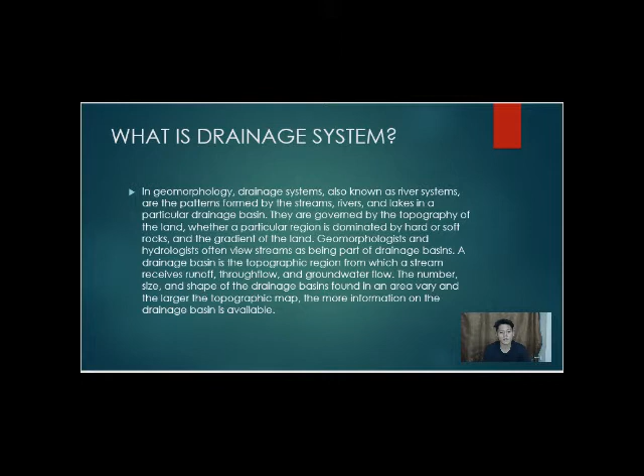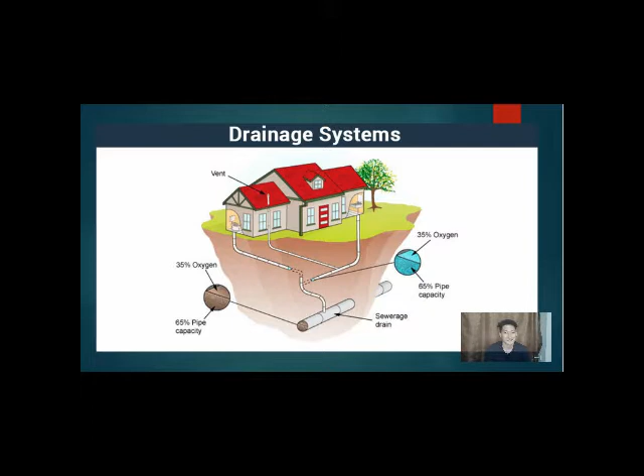So this is an example of the drainage system. And this is an example of the excreta drainage system, also known as a sewer drainage system.

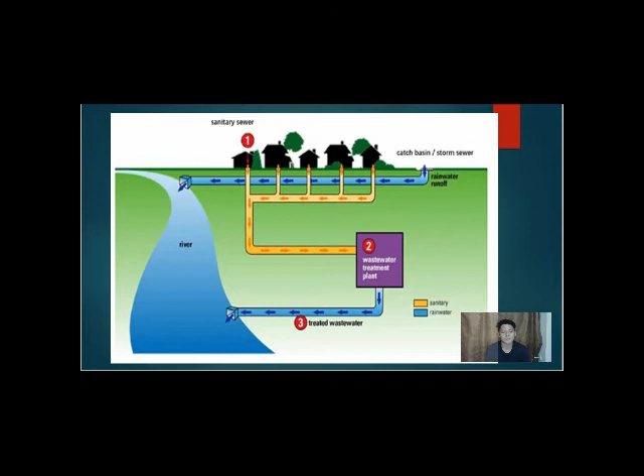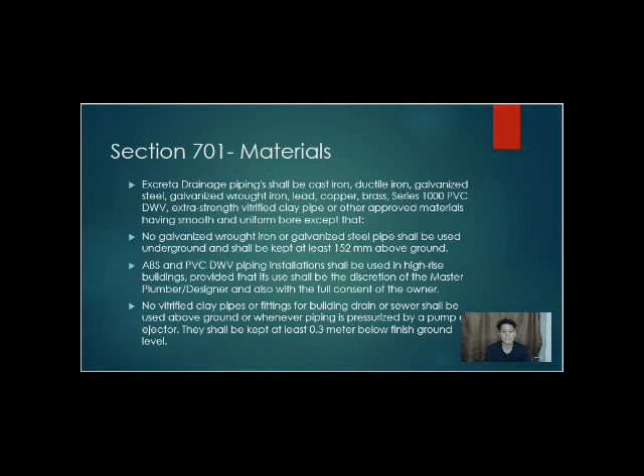Section 701. The materials. Excreta drainage piping shall be cast iron, ductile iron, galvanized steel, galvanized wrought iron, lead, copper, brass, Series 1000 PVC DWV, extra strength vitrified clay pipe, or other approved materials having a smooth and uniform bore, except that no galvanized wrought iron or galvanized steel pipe shall be used underground and shall be kept at least 152 mm above the ground.

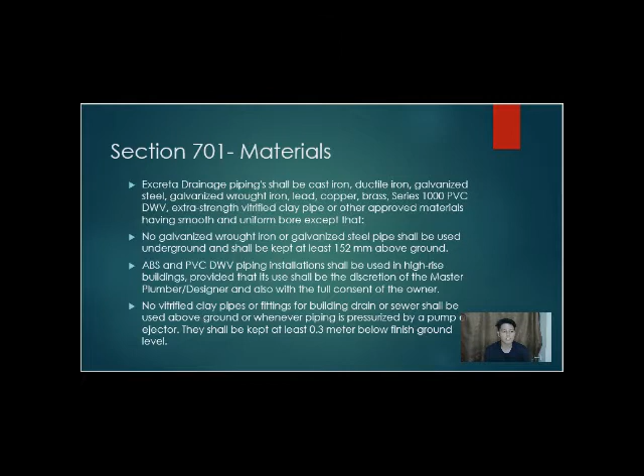ABS and PVC DWV piping installation shall be used in high-rise buildings, provided that its use shall be at the discretion of the master plumber or designer, and also with the full consent of the owner. No vitrified clay pipes or fittings for building drain or sewer shall be used above the ground or wherever piping is pressurized by a pump or ejector. They shall be kept at least 0.3 meter below finished ground level. In this section, it explains all the materials needed to construct an excreta drainage system.

Drainage fittings shall be cast iron, malleable iron, lead, brass, copper, ABS, PVC, vitrified clay, or other approved materials having a smooth interior waterway of the same diameter as the piping served, and all such fittings shall be compatible with the type of pipe used. Fittings on screw pipe joints shall be of the recessed drainage type. Burred ends shall be reamed to the full bore of the pipe. The threads of drainage fittings shall be tapped to allow 2% or 21 mm/m grade.

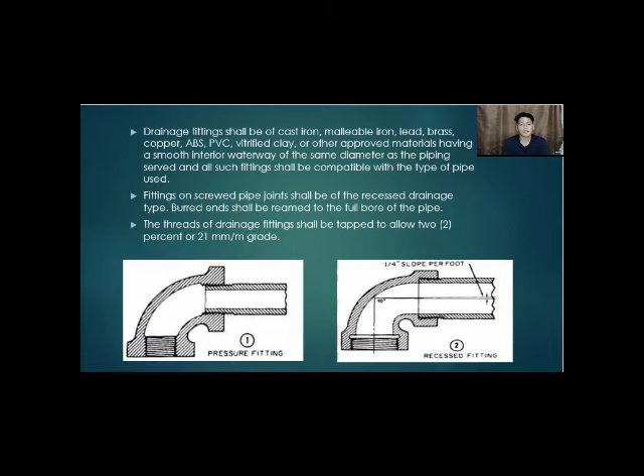So there are two types of fitting: the pressure fitting and the recessed fitting. The pressure fitting is a standard fitting used on water pipe. The recessed type of fitting, also known as cast iron drainage or Durham fitting, is generally required on all drainage lines. The recessed type is the most suitable for smooth joints. It reduces the probability of grease or foreign materials remaining in the joint and causing a stoppage in the line. Recessed fittings are designed so that the horizontal line entering them will be at a slope of 1/4 in per foot.

Section 702. The fixture unit equivalent. The fixture unit or FU rating of the plumbing fixtures shown in Table 7.2 shall be based on the size of the trap required, and the fixture unit equivalent of fixtures and devices not shown in Table 7.2 shall be based on the equivalent rated discharge capacity in liters per second in accordance with Table 7.3.

The maximum trap loadings for sizes up to 102 mm are as follows. Item number 1, the pipe size is 32 and the fixture unit is 1. Item number 2, the pipe size is 38 and the fixture unit is 3. Exception: self-service laundries.

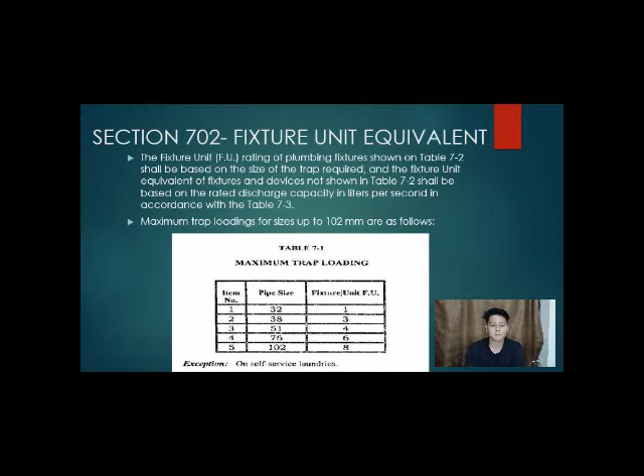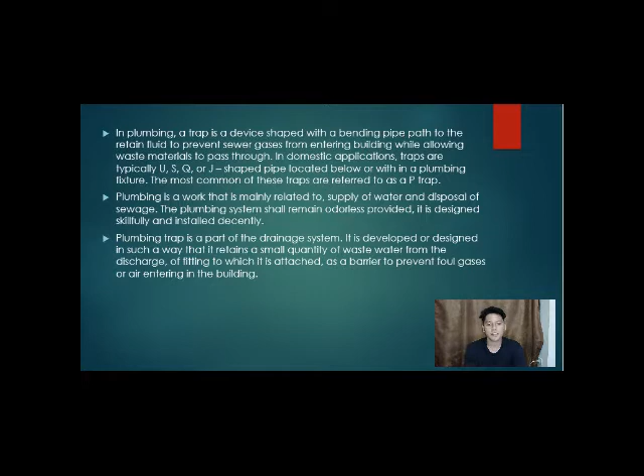So, various plumbing traps. In plumbing, a trap is a device shaped within a bending pipe path to retain fluid to prevent sewer gases from entering the building while allowing waste material to pass through. In domestic applications, traps are typically U, S, Q, or J-shaped pipes located below or within a plumbing fixture. The most common of these traps is referred to as a P-trap.

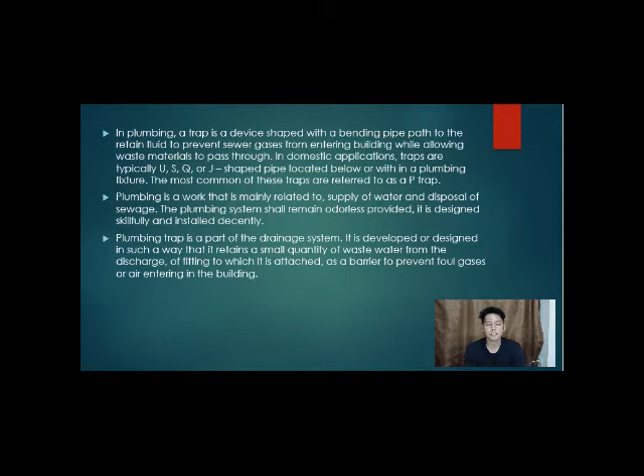Plumbing is work mainly related to the supply of water and disposal of sewage. The plumbing system shall remain odorless provided it is designed skillfully and installed decently. A plumbing trap is a part of the drainage system. It is designed in such a way that it retains a small quantity of wastewater from the discharge of the fitting to which it is attached, as a barrier to prevent foul gases or air entering the building.

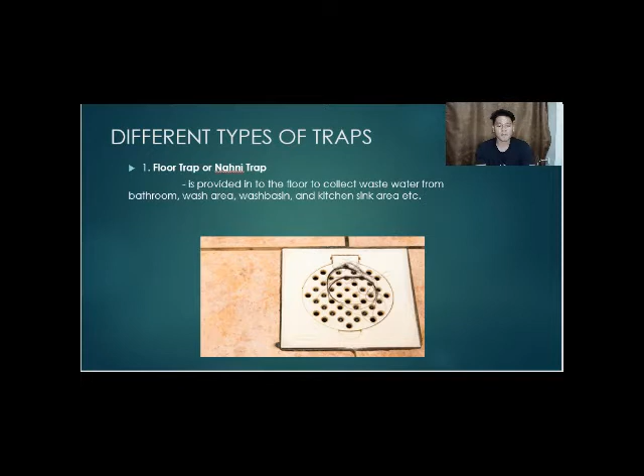As stated in the practical handbook on public health engineering, heavy cast iron gully traps shall be not less than 7.25 kg or 16 pounds in weight, with the cover weighing not less than 4.53 kg and the frame not less than 2.72 kg, and the total depth shall be not less than 30 cm or 1 foot.

Third is the P, Q, and S trap. They are classified according to their shape. They essentially consist of a U-tube, which retains water and seals between the foul gases and the atmosphere. It traps debris that has drained from the sink and prevents it from forming a clog or leak within the plumbing system, and stops sewer gases from passing into the home.

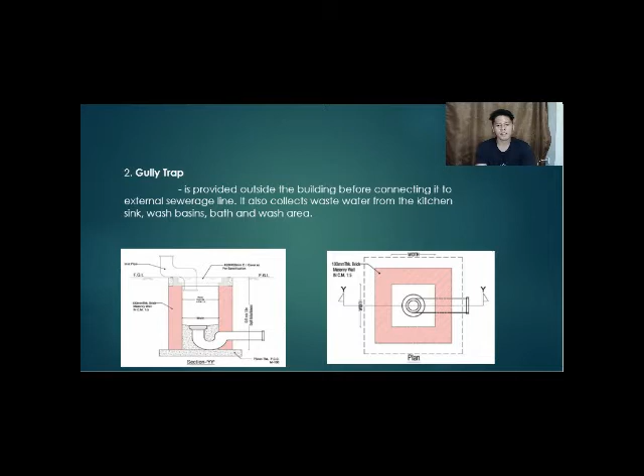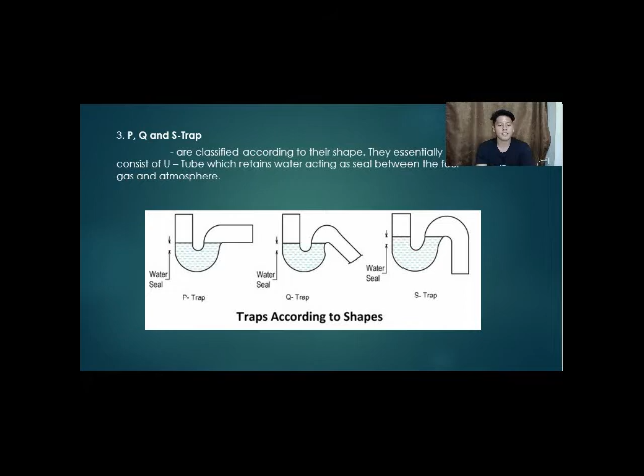Fourth is the intercepting trap. It is provided in the interceptor manhole or the interceptor chamber. An interceptor manhole is provided between the building sewer and a public sewer. Intercepting traps are provided to prevent the foul gases from the public sewer entering into the building sewer, providing a water seal. It has a deep water seal of 100 mm depth, and it also prevents entry of bugs and insects from the sewer line to the building sewer.

Fifth is the bottle trap. It is provided to receive wastewater from wash basins, kitchen sinks, and other appliances where the appliances do not have a built-in trap. It is a vessel of big diameter with a plumbing pipe that comes from the basin. When water gushes down, this vessel is filled with new water. Thus, the trap always remains filled with a certain amount of water.

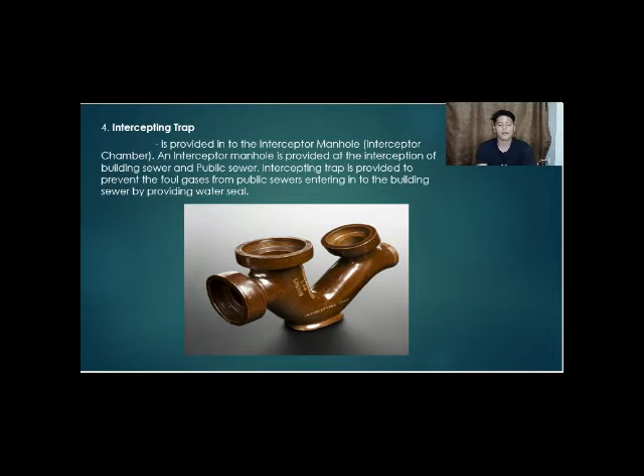When the sewer gases waft up the system through the outlet pipes, they reach the bottle trap, but they find their way sealed by the water that has collected in the trap. The passage remains closed and does not allow the return of waste and gases.

Sixth is the grease trap. It is installed in the waste pipe from the fixture for the purpose of separating grease from the liquid and retaining the grease. These traps are used to prevent oil from going into the sewer.

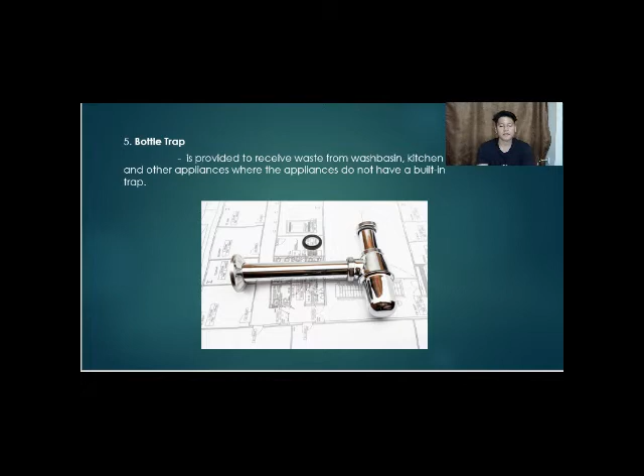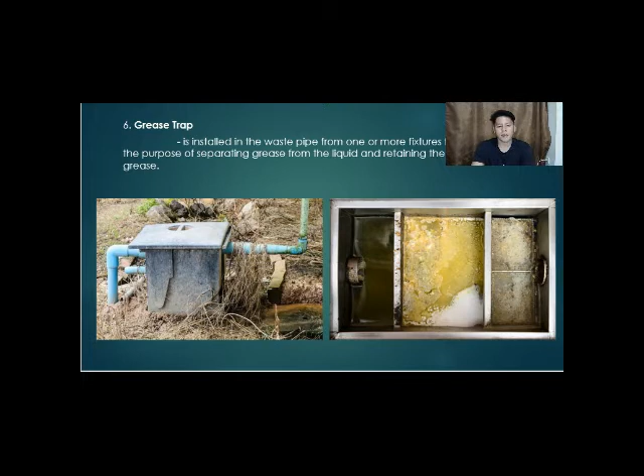Section 702, the drainage piping. The minimum size of the vertical and/or horizontal drainage piping shall be determined from the total of all fixture units connected thereto, and additionally, in the case of vertical drainage pipes, in accordance with their height or length. Table 7.5 shows the maximum number of fixture units allowed on any vertical or horizontal drainage piping, building drain or building sewer of a given size, the maximum number of fixture units allowed on any branch interval of a given size, and the maximum length in meters of any vertical drainage pipe of a given size.

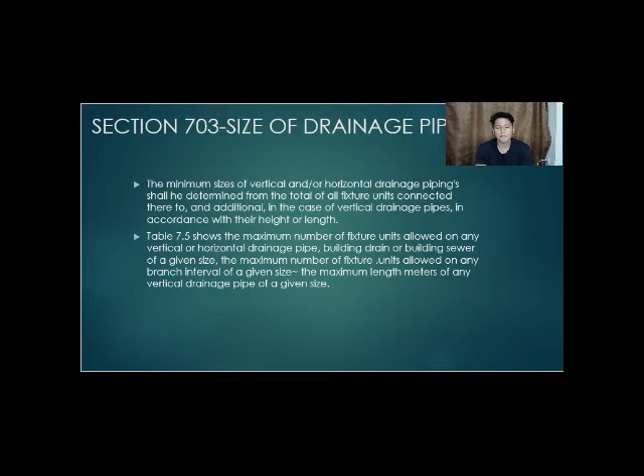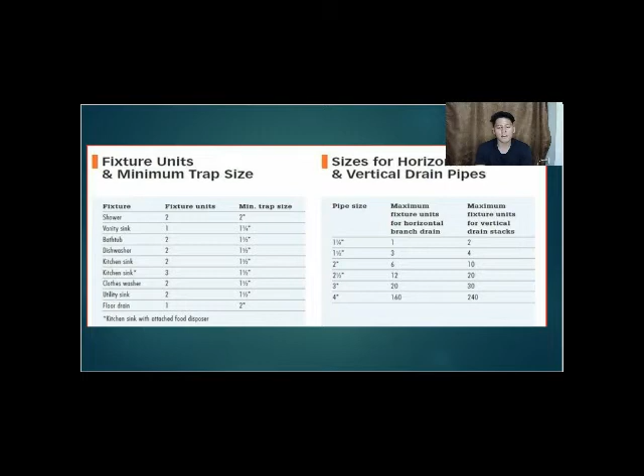Drain pipes are determined by the load on the pipes as measured by the total fixture units. Horizontal drain pipes less than 3 inches in diameter should slope 1/4 inch per foot toward the main drain. Pipes 3 inches or more in diameter should slope 1/8 inch per foot. Note, horizontal or vertical drain pipes for a toilet must be 3 inches or larger.

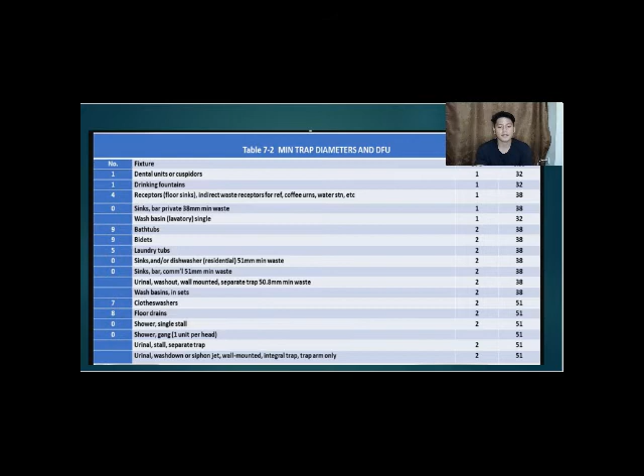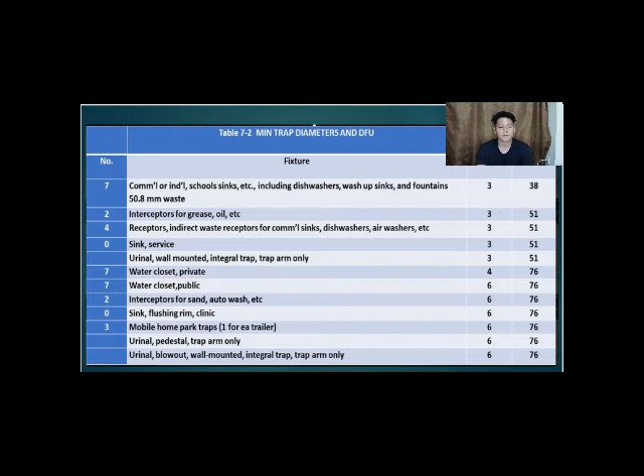Capacity over 3.15 liters per second shall be determined by the administrative authority. For a continuous flow into the drainage system, such as from a sump pump or ejector, air conditioning equipment, or a similar device, 2 fixture units shall be allowed for every 0.063 liters per second of flow.

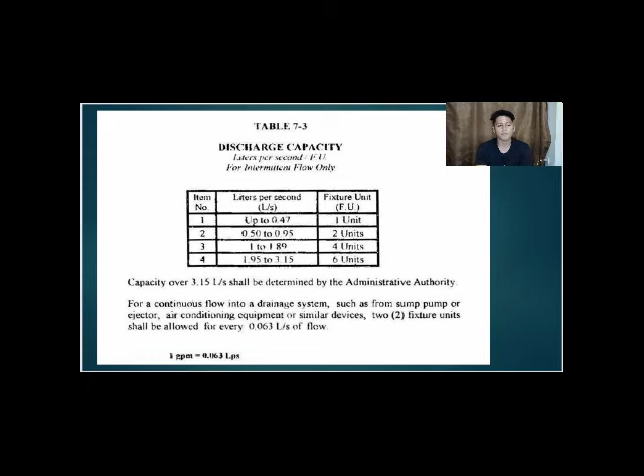Section 704, the fixture connection, excreta drainage. Inlet fittings: drainage piping shall be provided with an approved inlet fitting for fixture connection, correctly located according to the size and type of the fixture proposed to be connected. Second is the single vertical drainage pipe. Two fixtures set back to back or side to side within the distance allowed between the trap and its vent shall be permitted to be served by a single vertical drainage pipe, provided that each fixture wastes separately into an approved double fixture fitting, having the inlet openings at the same level.

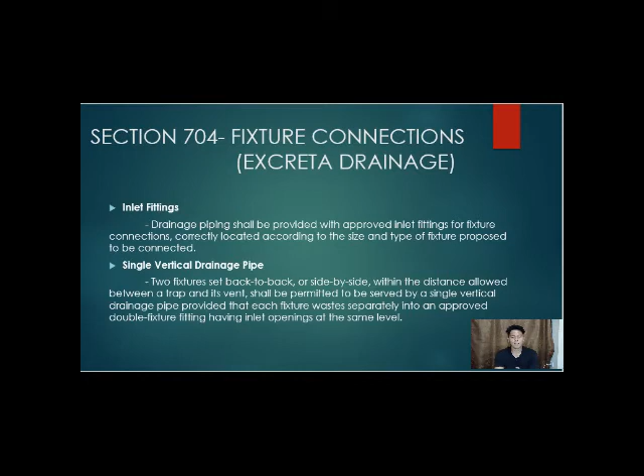Third is the commercial sink. Pot sinks, scullery sinks, dishwashing sinks, silverware sinks, and other similar fixtures shall be connected directly to the drainage system. A floor drain shall be provided adjacent to the fixture, and the fixture shall be connected on the sewer side of the floor drain trap, provided that no other drainage line is connected between the floor drain waste connection and the fixture drain. The fixture and the floor drain shall be trapped and vented in accordance with this code.

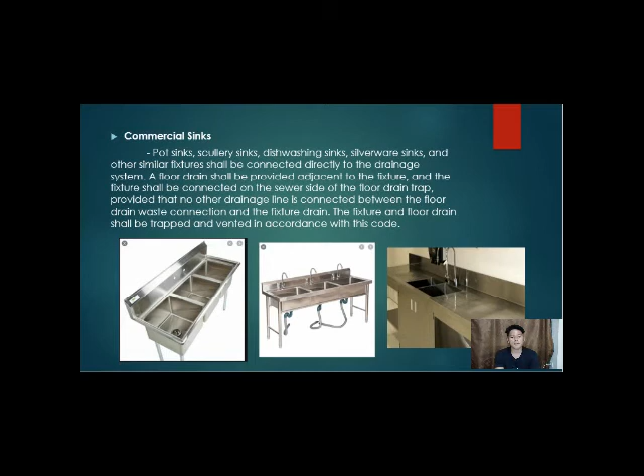Section 705, changes in direction of excreta drainage flow. Changes in direction of the drainage piping shall be made by the appropriate use of approved fittings and shall be of the angle presented by a 22 1/2 degree or 1/16 bend, 45 degree or 1/8 bend, 60 degree or 1/6 bend, or other approved fittings of equivalent sweep.

Horizontal drainage lines connecting with a vertical stack shall enter through 45 or 60 degree wye branches, combination wye and 1/8 bend branches, sanitary tee or sanitary tapped tee branches, or other approved fittings of equivalent sweep. No fitting having more than one inlet at the same level shall be used unless such fitting is constructed so that discharge from one inlet cannot readily enter the other inlet.

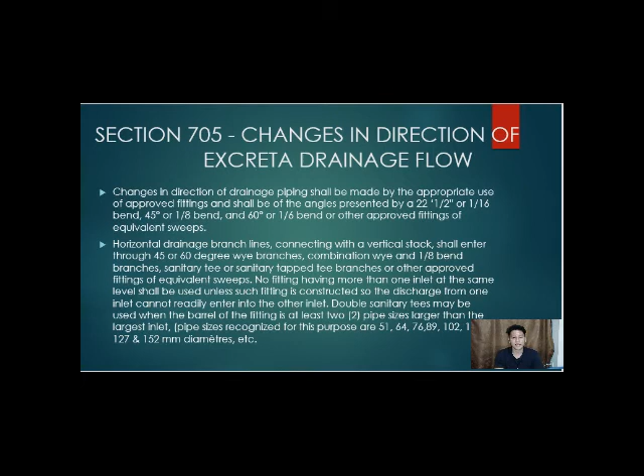Double sanitary tees may be used when the barrel of the fitting is at least two pipe sizes larger than the larger inlet. Pipe sizes recognized for this purpose are 51, 64, 76, 89, 102, 114, 127, and 152 mm diameter, etc.

Drainage systems must work in spite of the small force that gravity exerts. Since the drain pipes carry solids, such as feces and toilet paper, clogging is a major problem. Consequently, the pipes that serve water closets are large diameter, at least 4 inches or 10 centimeters. Drainage pipes also use wide sweep or 45 degree bends to maintain smooth flow because clogs are almost inevitable. Cleanouts are used to access pipes where they change direction.

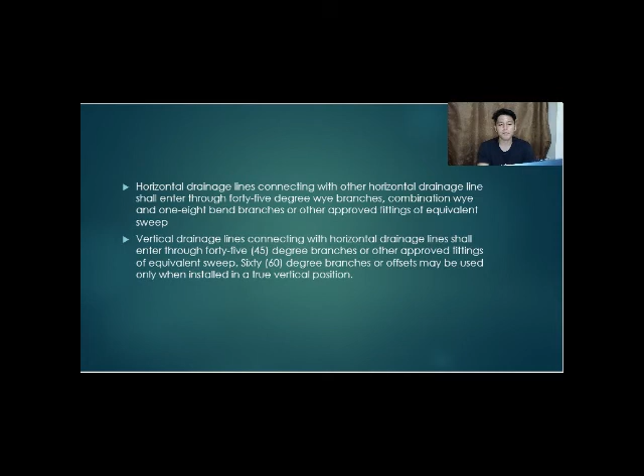Horizontal drainage lines connecting with other horizontal drainage lines shall be entered through a 45 degree wye branch, combination wye and 1/8 bend, or other approved fitting of equivalent sweep. Vertical drainage lines connecting with horizontal drainage lines shall be entered through a 45 degree branch or other approved fitting of equivalent sweep. 60 degree branches or offsets may be used only when installed in a true vertical position.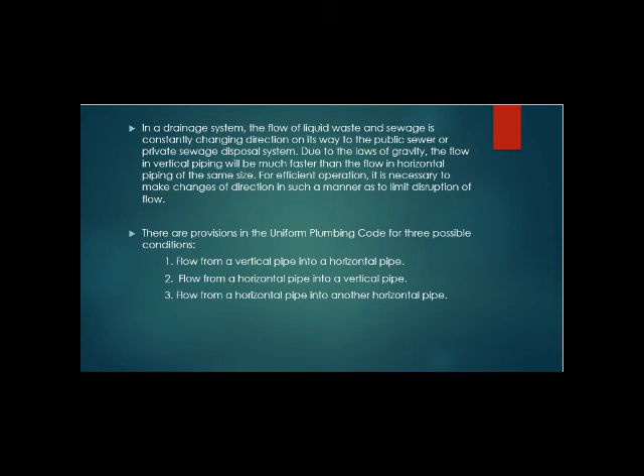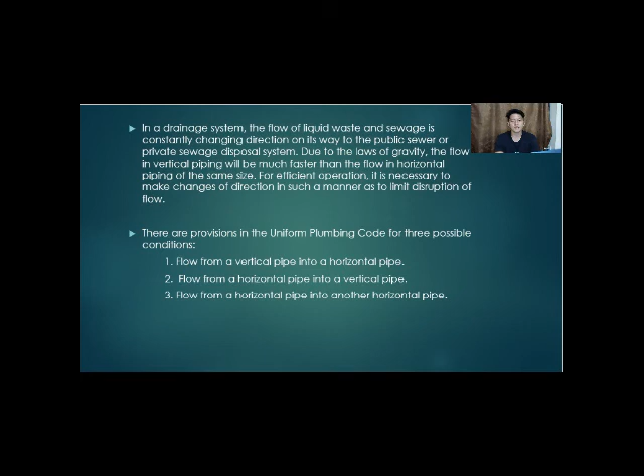In a drainage system, the flow of liquid waste and sewage is constantly changing direction on its way to the public sewer or private sewage disposal system. Due to the law of gravity, the flow in vertical piping will be much faster than the flow in horizontal piping of the same size. For efficient operation, it is necessary to make changes of direction in such a manner as to limit disruption of the flow.

So there are provisions in the Uniform Plumbing Code for three possible conditions. First, the flow from vertical pipe into horizontal pipe. Second, the flow from horizontal pipe into vertical pipe. Third, the flow from horizontal pipe into another horizontal pipe. So first is horizontal to vertical.

A change in direction of the drainage flow from horizontal to vertical creates an increase in velocity, which also increases the carrying capacity of the pipe at the point of transition. Short pattern fittings such as sanitary tees and quarter bends are permitted. However, there is a difference between the carrying capacity of short pattern and long pattern fittings.

Tests have determined that long pattern fittings used to change flow direction from horizontal to vertical, such as a wye or combination wye and 1/8 bend, have twice the capacity of short pattern fittings. The downward sweep of the long pattern fitting reduces obstruction of air space and presents a smoother transition to annular flow.

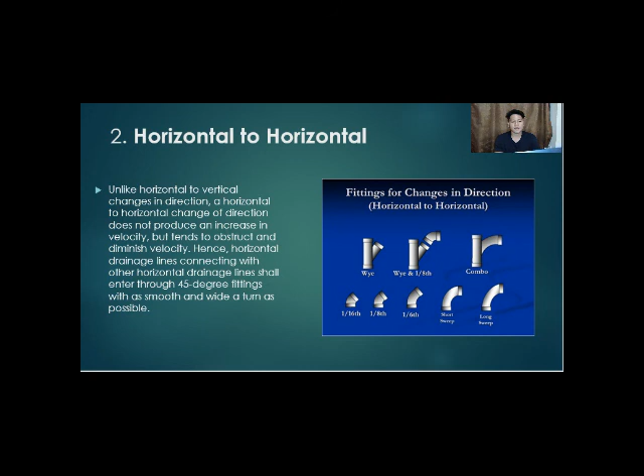Second is horizontal to horizontal. Unlike horizontal to vertical changes in direction, horizontal to horizontal changes of direction do not produce an increase in velocity, but tend to obstruct and diminish velocity. Hence, horizontal drainage lines connecting with other horizontal drainage lines shall be entered through 45 degree fittings, with as smooth and wide a turn as possible.

Third is vertical to horizontal. One of the most critical changes of direction from vertical to horizontal flow in the drainage system is the base of the stack. As the vertical flow makes a forced entry into the horizontal pipe, the flow becomes violently turbulent and abruptly increases in depth downstream of the vertical stack, causing what is called a hydraulic jump.

This jump can cause back pressure upstream of the jump and affect trap seals in close proximity to the base of the stack. The proper transitional fitting with the proper sweep will reduce the effect of the hydraulic jump on the sewer system.

These fittings will be 45 degree angles, wyes, combination wye and 1/8 bends, or sweeps, long or short. The short sweep fitting is not to be confused with a quarter bend fitting, which has a short 90 degree radius bend. The short sweep radius approximates the radius of two 1/8 bends put together.